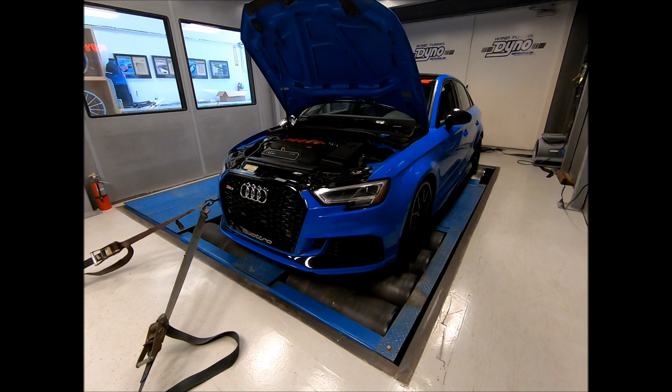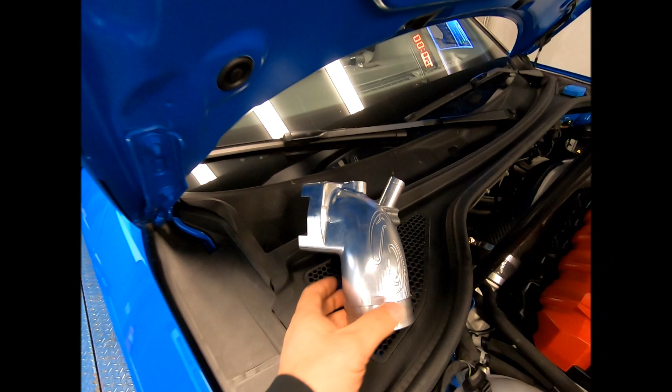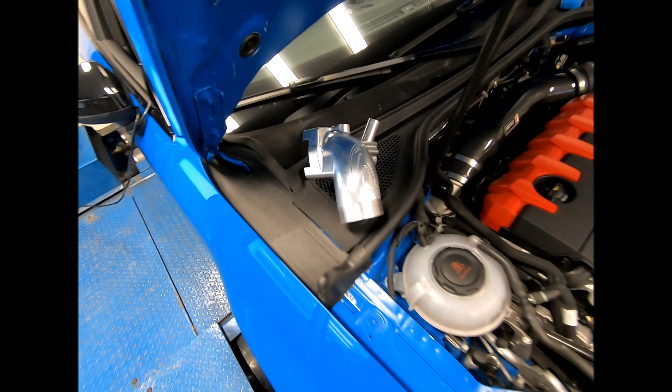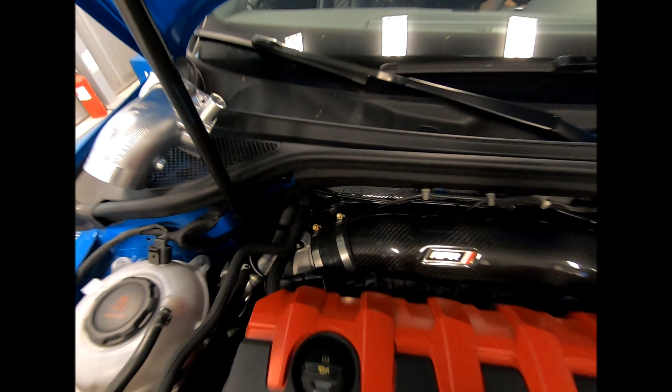Alright folks, we've got our Voodoo Blue RS3 strapped down on the dyno here today for some testing. We're going to be checking this part out to see what it yields on the dyno. It is our throttle body inlet that replaces the factory unit that has some restriction, and we're going to see what it does. We're going to test it on 91 octane. This car is equipped with the APR Stage 1 tune. It's got the cast turbo inlet pipe, APR carbon fiber transition piece, leading over to the stock air box using

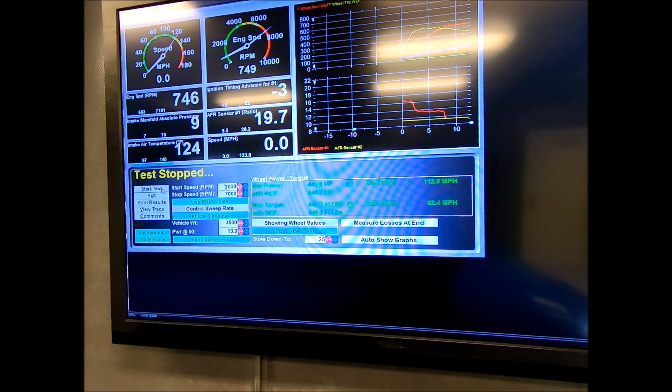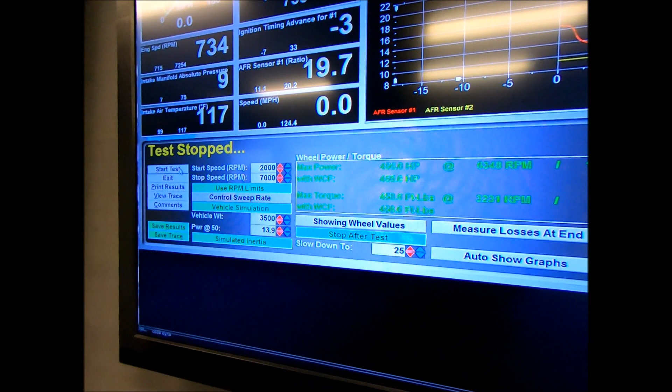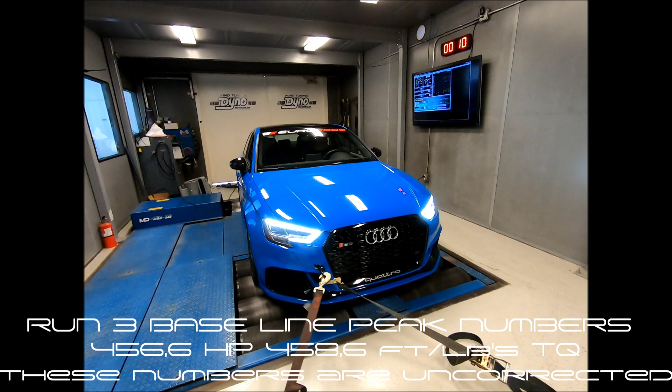Number 3, 456 and 458. I'm gonna walk you guys around the dyno on this one.

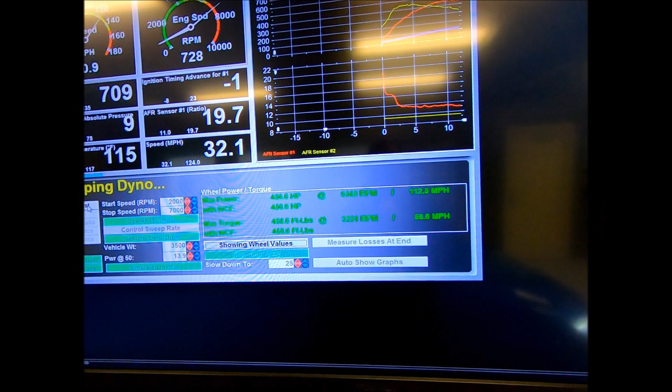Stop the dyno. We're gonna switch the part out and see how the part does. Can you pop the hood?

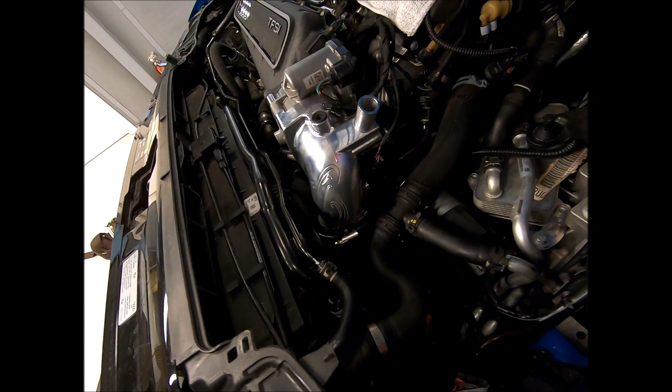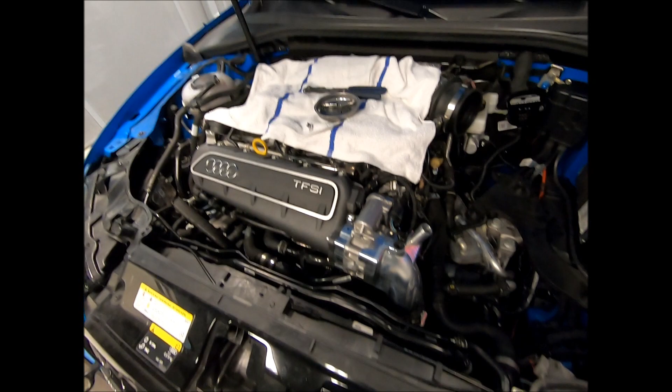So far, throttle body elbow, intake manifold's gone back into place, and our new high flow pipe underneath as well. As you can see, the factory rubber mount that holds the engine cover goes right into here, and we'll secure the engine cover once we're done. We're now going to throw in the stock air box and resume our testing.

All the parts are back on, new throttle body pieces on there, our new shiny spacers on there, and engine covers back on, airbox, and we're ready to rock and roll. Let's see what happens.

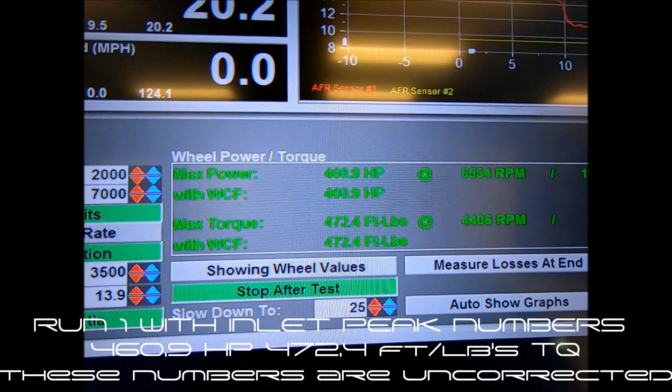First pass, 460 and 472 to the wheel. Number 2, 459 and 464.

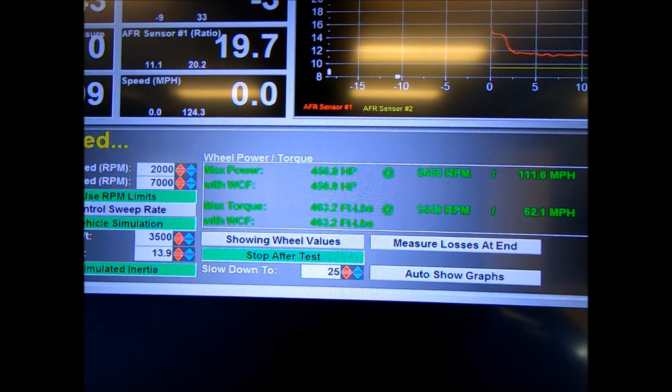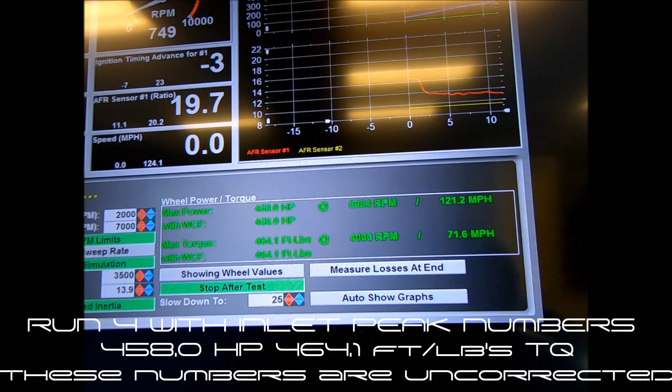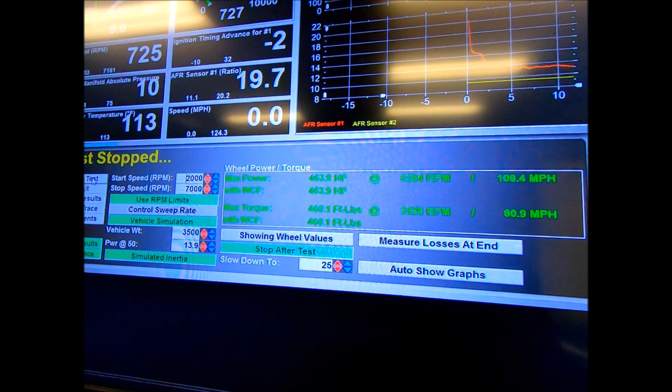Number 3, 456 and 463. 463 and 460.

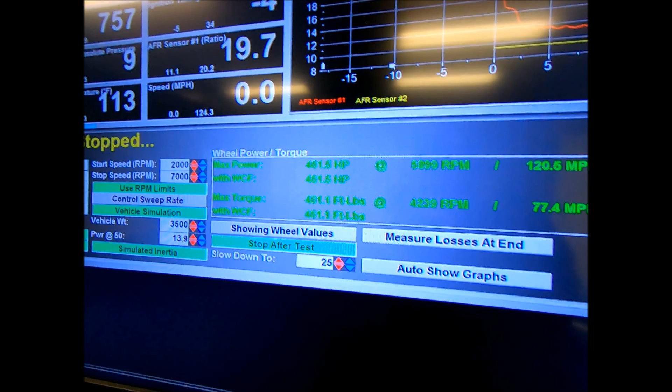At this point, but we're gonna do one more just for fun to see what she does.

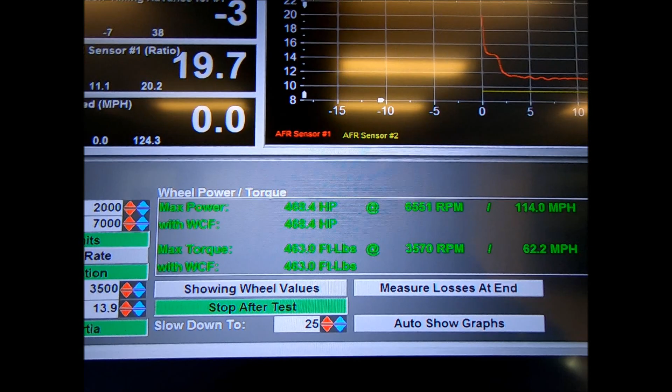And 463 as adaptation took place. I don't think we need to torture this car anymore. We are definitely making more power than stock, but we're going to want to see how much more power we made under the curve, because that's the telltale sign of how much better this product is over stock. So give us a moment, we'll get all that sorted for you.

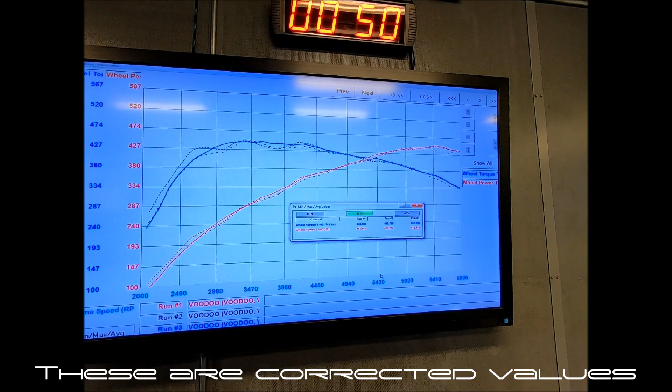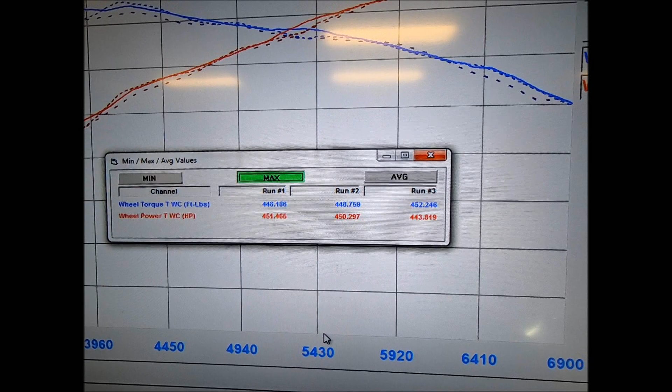Okay, so this is the last 3 passes where we got the max gains out of the vehicle with the stock throttle body elbow in place. So run 1, 448 and 451, run 2, 448 and 450, and run 3, 452 and 443. So we're gonna go with run number 1.

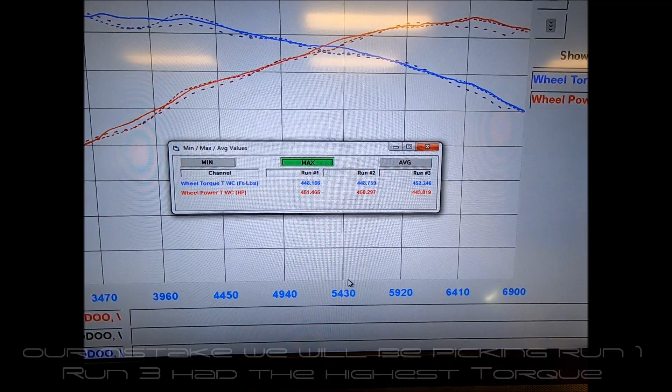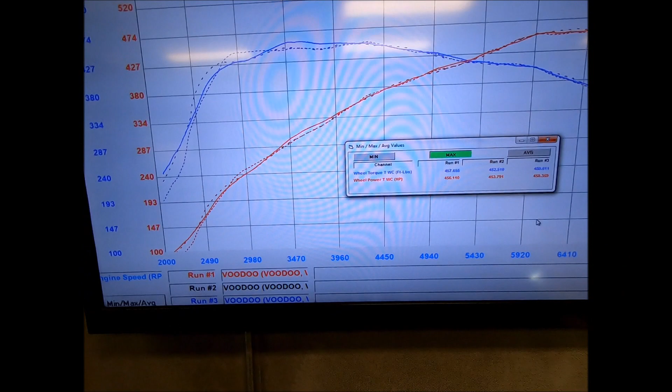We're gonna lay that guy over the best run from the performance mod set. So we're gonna actually go look at that in a second. So let us pull those up real quick. So here we have the 3 runs that were made, the last 3 runs of the set that we made as the vehicle was going through adaptation. Run 1, 457, 456, run 2, 452, 453, and run 3, 450, 458.

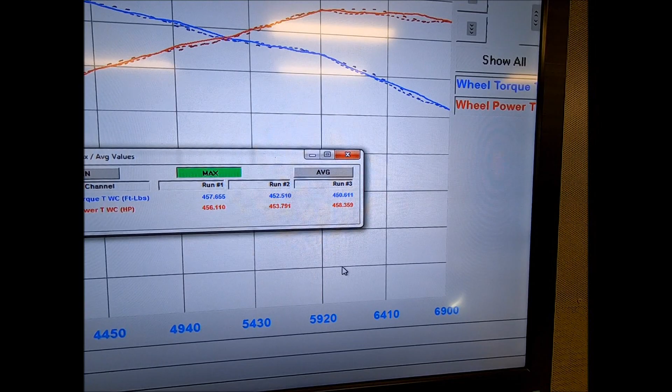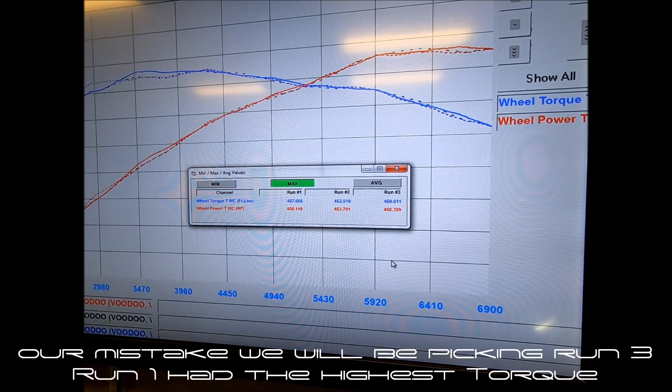So we're going to pick run 3, which was actually the one with the most heat in it, and we're going to run that up against the best run with 452 to the wheel off of the stock throttle body set.

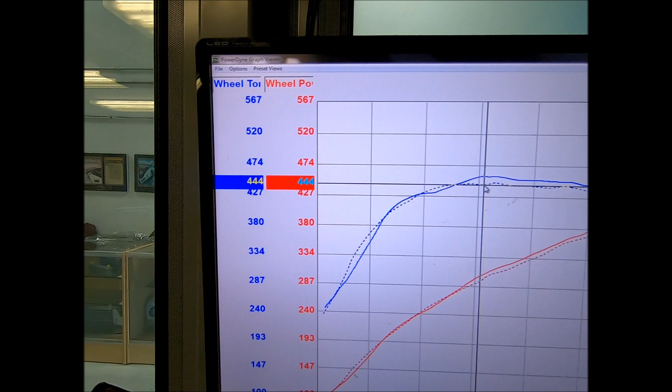So for torque here, for example, at about 3,500 RPM, 445-ish to 457. So you've got a good 12 pound-feet of torque there. Horsepower starts being generated, additional horsepower at 289 versus 299. So there's 10 wheel horsepower at 3,470 RPM, more towards the mid-range. At 4,900 RPM, 392 versus 403. So roughly about 10 horsepower there.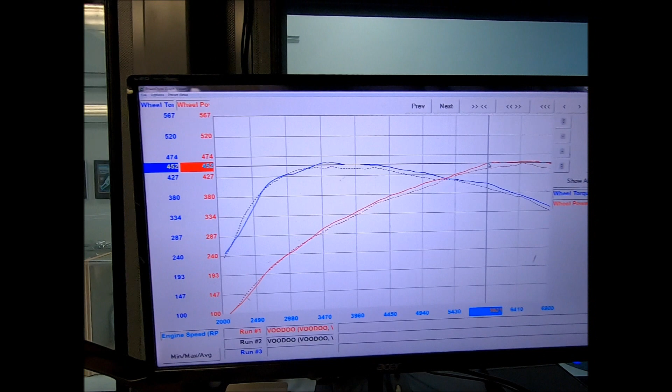We've got 420 torque versus 431. So we've got about 11 pound-feet of torque at the same RPM. Moving further down the line at 5,900 RPM, 390 pound-feet of torque versus 402, 12 pound-feet of torque there. Horsepower starts getting interesting here. 5,900 RPM, 439 wheel horsepower, sorry, versus 452. Solid 13 wheel horsepower there.

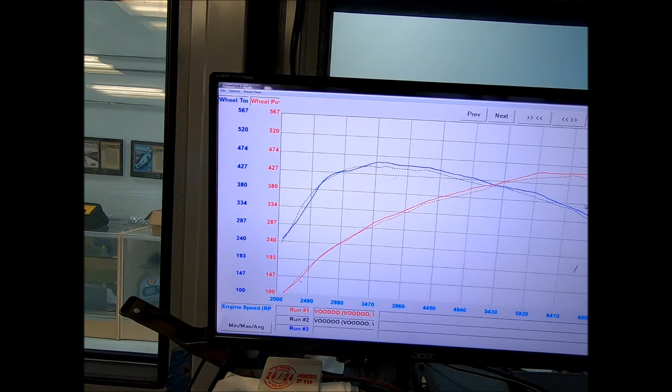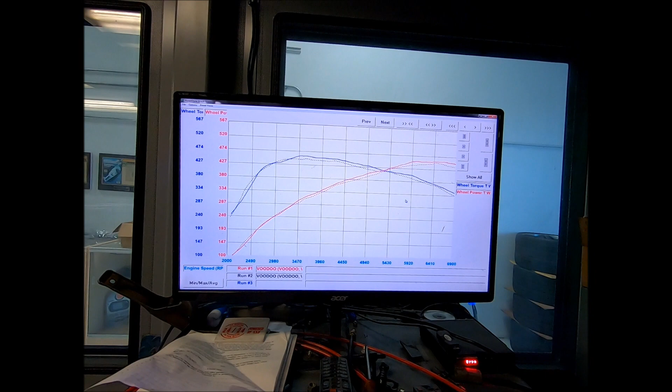It tapers obviously a little bit. Power band's always going to fluctuate. Towards redline, we've got at 6,800 RPM, 439 horsepower versus 453, folks. 439 versus 453. This is on 91. We got exact same solid gains on this vehicle with E85, doing the exact same test. We're going to be posting these videos for you, posting these graphs so you can see exactly what it makes.